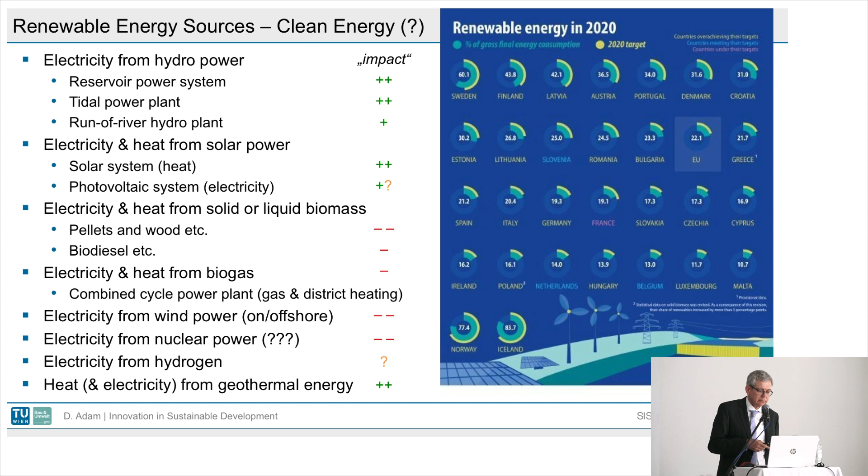And it is not time to talk about this in detail, but I would like to give you one example to compare energy systems with respect to the emissions of fuels for heating of buildings. And what I would like to say in the beginning, heating here is only on site. That means a central heating of the building, which is affected, and only the direct emissions are seen here. That means life cycle is excluded.

And now if you have a look at those energy systems which are mainly used in Central Europe: wooden pellets, heating oil, gas, electricity, air source heat pumps, geothermal heat pumps, and geothermal heat pumps run with photovoltaic electricity. We can clearly see both particulate matter, what we also call fine dust, and on the other hand, our carbon emissions.

That we see wooden pellets is disastrous. Heating oil is much better compared to that. Gas is better than heating oil, but not good enough. But the good news is that particulate matter is not contributing so much. And electricity very much depends on where it is produced. And there are two benchmarks.

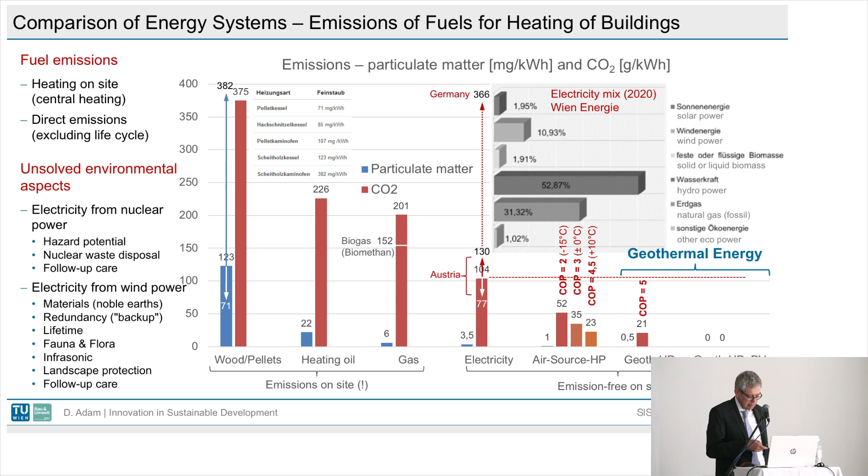Okay, coming to geothermal energy. In the beginning, I would like to show you a case history, which is my private one. This is my house, the house of my wife and myself, which was constructed in 1899 by one of the family members of my wife. At that time, the house was heated with coal and coke, and the heating demand was about 63 megawatt hours. In 1984, so 85 years later, my father-in-law refurbished the house and changed the heating system to a gas heating, but there was no thermal refurbishment of the house, so the heating demand remained the same.

And a couple of years ago, my wife and myself extended the house. Now the size is double what it was before. And what we did was a thermal refurbishment and insulation. We reduced the heating demand by a factor of 2, taking into account the square meters of the house. But in total, it remained the same, but it is double the size. And what we did, we changed it to a ground source system combined with a solar plant. That means on

the roof there are solar panels and a PV system, and in the ground 5 borehole heat exchangers, each with a length of almost 130 meters. And if you have a look now, what is needed from external energy is just the blue stains here. It's quite little. The rest is a gift of nature. And if you have a look at the numbers, we can see that only 15% of the heating demand has to be covered by external energy, by electricity, and 85% is given by nature.

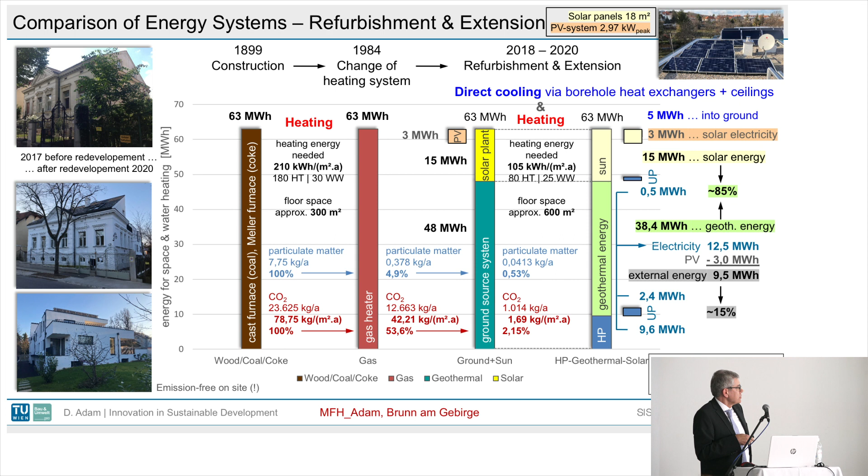Geothermal energy - this is one of the solutions I would like to talk about today. Geothermal energy is not new. If we look at our ancestors, they already benefited from the so-called thermodynamic inertia of the ground. They lived in caves - we have a lot of nice caves in Croatia. Here is a picture of adjacent Slovenia, Postojnska Jama.

What did the people do? They spent a lot of time in the caves, because in summer, when it was very hot outside, it was pleasantly cool inside, and in winter it was the other way around - pleasantly warm inside when it was very cold outside. This is due to the so-called thermodynamic inertia.

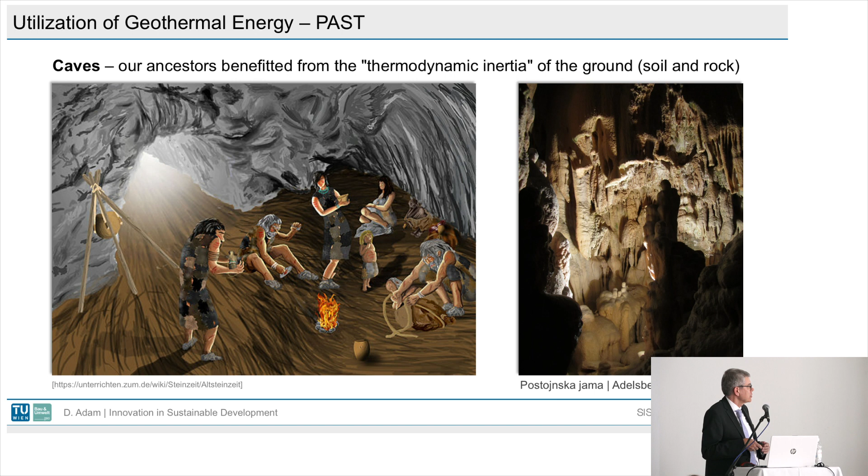And that is exactly what we use today when we utilize geothermal energy. What is necessary to utilize it? An invention that was already made in 1856, in experiments on the reproduction of heat bound in steam by water power for use in evaporating brine. What did this guy, Peter Ritter von Rittinger, want to say? Nothing else - he invented the heat pump.

With the heat pump we can increase the temperature, which is relatively low in the ground, on average between about 8 and 14 degrees, to temperatures needed for heating purposes - that means at least 25 to 35 degrees.

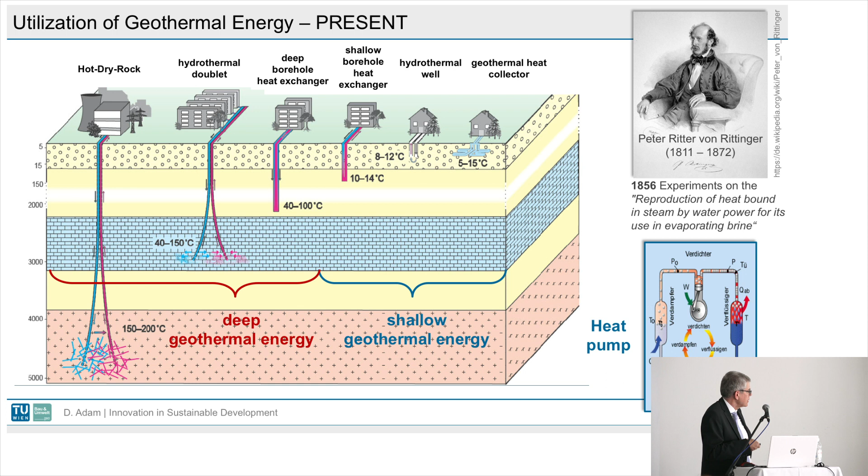We have different systems today: deep geothermal energy, which I will not talk about today, and shallow geothermal energy, which I will talk about today. In Austria there is a clear limit between deep and shallow, set at 300 meters, because different rights and laws apply. Up to 300 meters we have the water right, and beneath that we have the mining right. So this is shallow geothermal energy.

There is one more question: do we have enough geothermal energy? We did a study already 15 years ago in Austria. You can see our country with all the big cities - Vienna, Graz, Klagenfurt, Villach, Innsbruck, Salzburg, Linz, etc. What we can see here is that only in the centers are there some red spots.

That means there is no coverage of demand there, but we have to take into account that we investigated only up to depths of 100 meters, and we did not account for groundwater. So it's really just the earth we took into account, only up to a depth of about 100 meters. In the rest of the country you can see yellow and green spots, meaning there is a distinct surplus and even an excessive surplus.

In absolute numbers, talking not only for Austria but also for Croatia and all other Central European countries, we have a surplus of about 1,000 to 10,000 times more energy available than we need. So there is definitely enough geothermal energy for everyone.

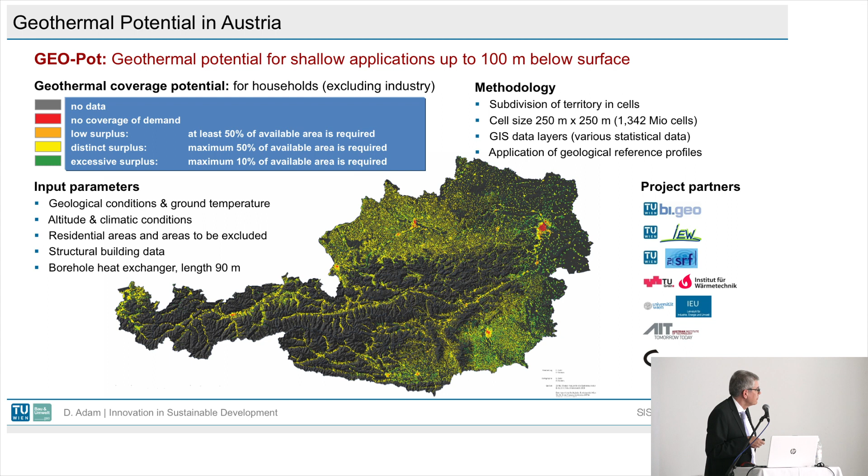So let's look at the system - how do such systems work? Geothermal energy is a sustainable, renewable primary energy source, and it is supplied for heating and cooling if we consider shallow systems. It mainly consists of two circuits: the primary circuit and the secondary circuit, with the heat pump in between.

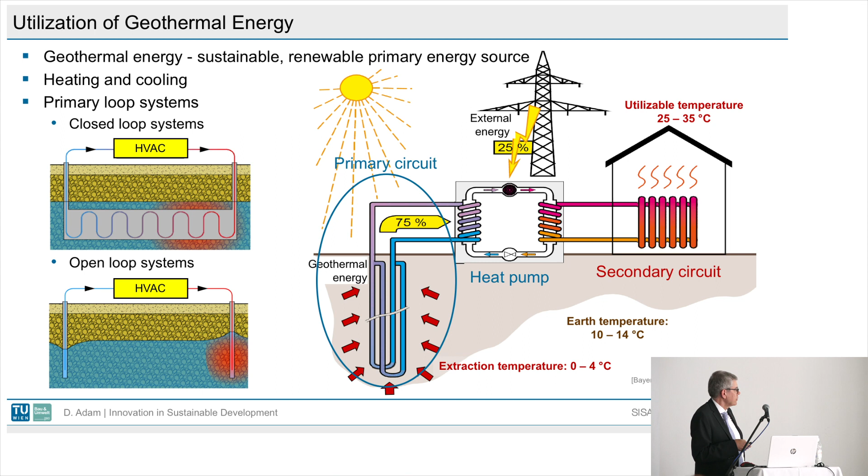And the primary circuit is made of a closed loop system or an open loop system. And from the geotechnical point of view, it is interesting to look at how we can extract the energy out of the ground. We have been working on that for almost 29 years now.

Closed systems: piles, geotechnical elements, bored piles or bored pile groups are earth-coupled structures, as well as driven piles and walls made of diaphragm walls, bored pile walls, mixed-in-place walls, sheet pile walls, slabs, floor slabs, tunnel elements, tunnel slabs, lining segments, and heat exchanger pipes incorporated in concrete structures. But there are more, for instance geotextiles in tunneling, or even anchors we developed, and others like sewers in big cities that transport a huge amount of heat which can be utilized.

For deep geothermal energy, borehole heat exchangers, the open systems are mainly wells, shaft wells, drilled wells, and horizontal filter wells. Energy can also be generated from open water, from rivers, lakes, ponds, etc. Others, with respect to deep geothermal energy, include the hot dry rock technology and the hydrothermal doublet. With these systems, electricity can also be generated.

If you look at a typical metro station constructed in recent years in Vienna, and which is also currently being constructed, we can see that energy piles can be applied, but also energy bored pile walls, diaphragm walls, energy tunnel slabs, energy floor slabs, and also energy geotextiles or lining elements can be used to generate the energy.

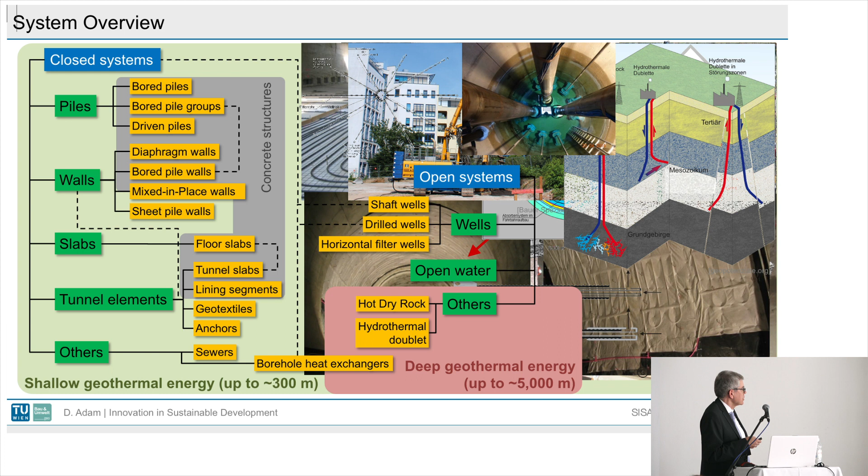So the positive thing is that we can use synergetic effects. All these elements need to be constructed anyway for structural and static reasons, and we can at the same time use these elements to generate energy out of the ground.

Sure, we need a place for the heat pump and the cooling machine, we need a place for all the pipelines, etc.

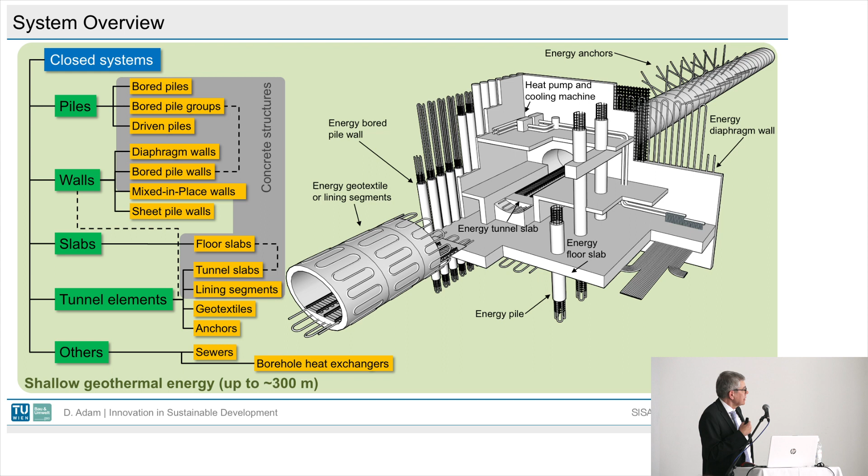Before we go a little bit more into detail, I would like to present the advantages when we look at the operation schemes.

The main application is heating with a heat pump, with high savings of primary energy. If you have a coefficient of performance of 4, that means the usable energy divided by the external energy, that is electricity, since both can be used. We have a coefficient of performance of 4 if, for instance, 25% of electricity is needed to run the system. Nowadays I would say we have COPs of about 5 and even more, meaning we need on average less than 20%.

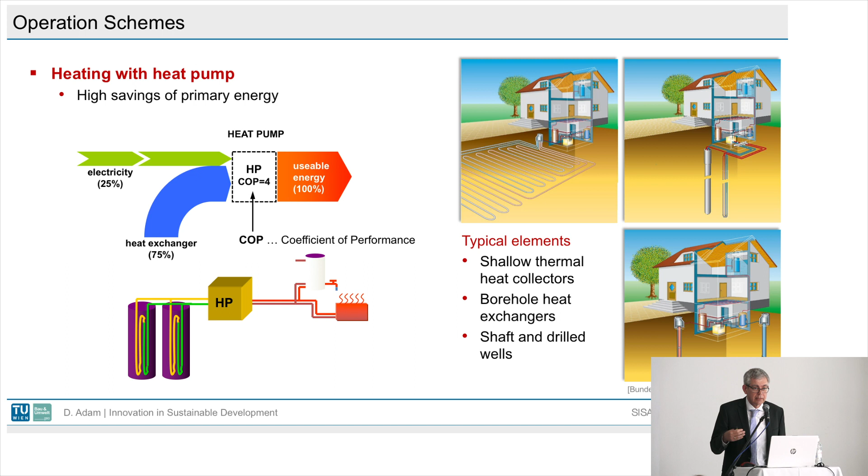Typical elements are shallow thermal heat collectors or borehole heat exchangers or shaft and drilled wells, with the disadvantage that they have to be constructed separately compared to what I presented on the slide before.

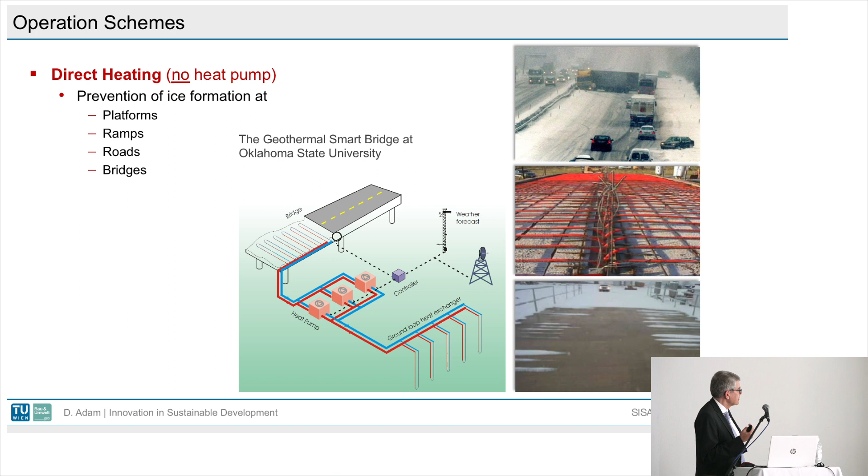Direct heating without a heat pump, for instance for prevention of ice formation at platforms, ramps, roads and bridges, can be done in some special cases. But more important is the cooling purpose, which is increasingly in demand. Cooling with a cooling machine is the reversal process of the heat pump.

Everyone has a fridge in their apartments, in their houses - this is exactly the same principle. But much more interesting is direct cooling when no cooling machine is needed, because there's no need for any air conditioning machines, and only the energy for circulation pumps is necessary.

From my point of view it is really impressive, and we've proven this in our house, where we have a so-called ceiling cooling system, that the removal of 50 kilowatts of waste heat can be done with just 1 kilowatt of pump power.

To give you the example of our house: every year we bring about 5,000 kilowatt hours back to the ground to regenerate it with our borehole heat exchangers. That means we just need 100 kilowatt hours, and 100 kilowatt hours costs about 40 euros. So the cooling of a house with 5 apartments just costs 40 euros. This is a big advantage and we should focus much more on that.

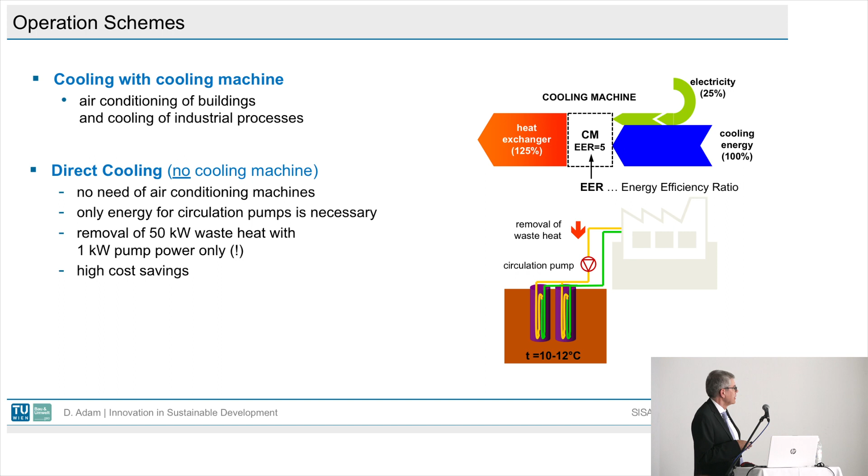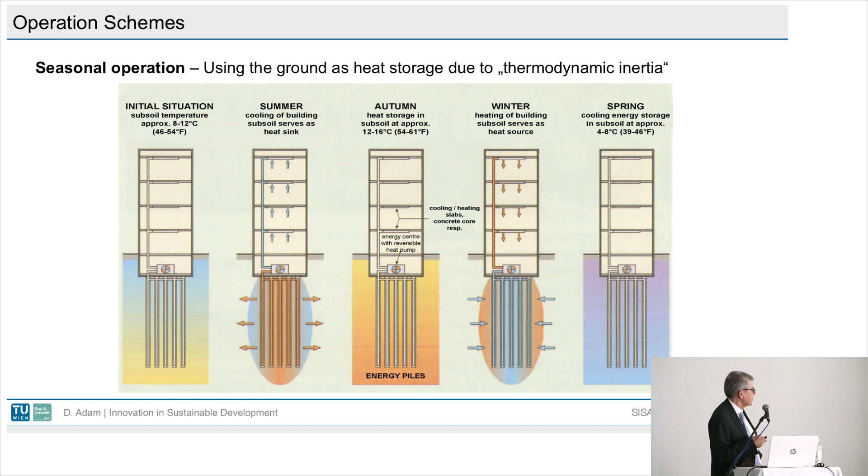With respect to sustainability, such plants should be operated seasonally. That means the ground is used as a heat storage due to the thermodynamic inertia I mentioned before, with respect to the caves of our ancestors - they did exactly the same. For example, in summer we start to cool the building, which means we heat up the ground.

In autumn we have a heated up ground, and this heat can be used in winter for heating the building, so we cool down the ground again. In spring we have a cooled down ground in order to start the reverse process, to cool the building and to heat up. If you're in balance, the ground is just a storage, nothing else. This is a big advantage.

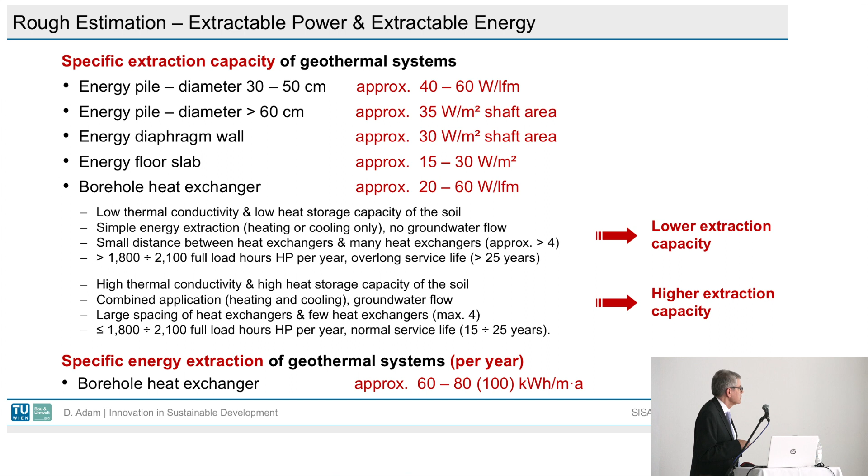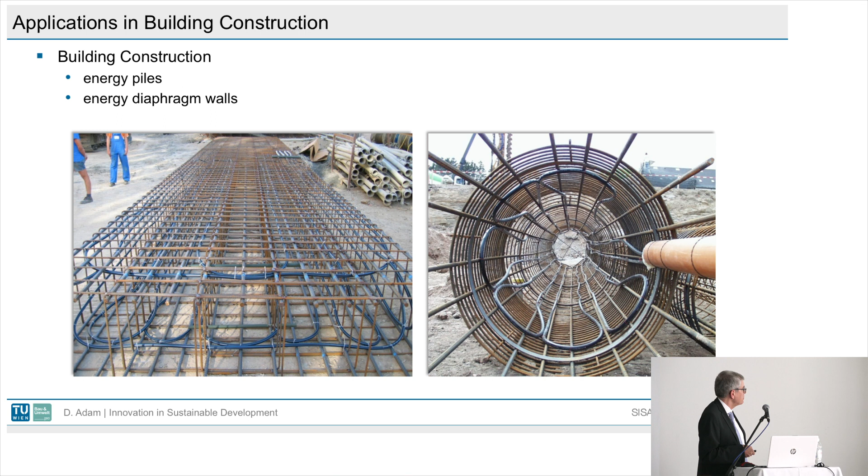Coming now to the heat exchangers in more detail, some applications in building construction and also in tunneling, what we did in the last about 29 years. Here we can see some typical energy piles and energy diaphragm walls. The absorber pipes, or heat exchanger pipes as they're also called, are mounted on the reinforcement cage.

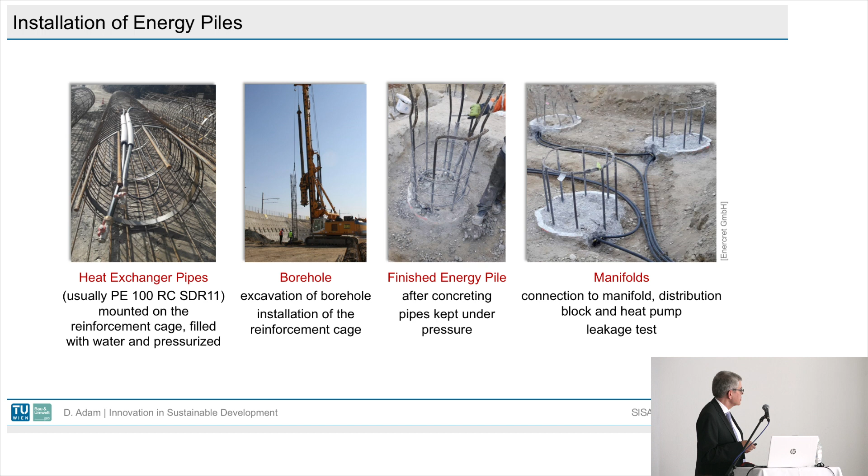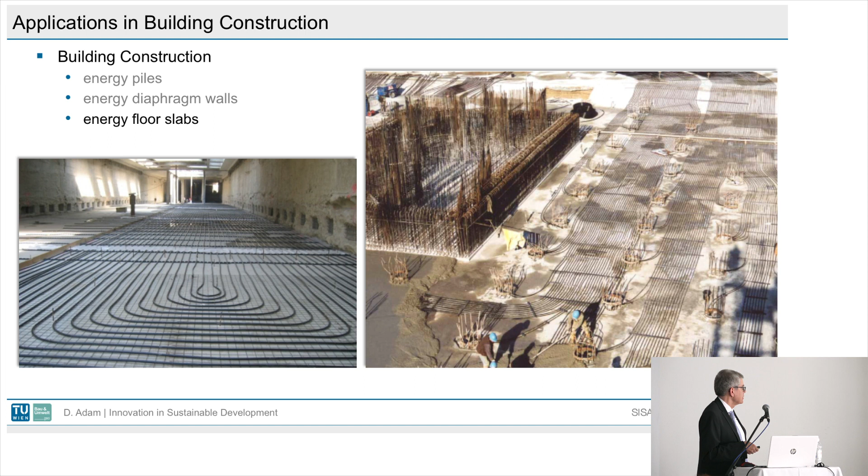Or the energy floor slabs, that means in the blinding layer all the heat exchanger pipes are installed, and they can be combined with energy piles, as shown here in the photo on the right-hand side.

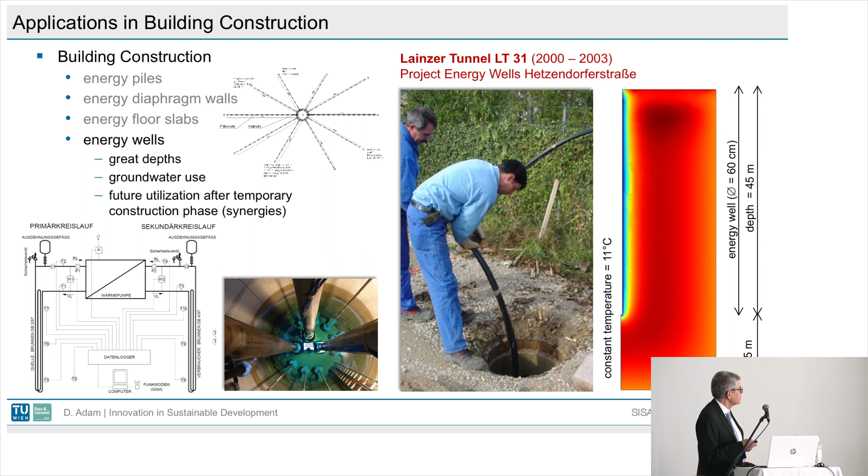Between 2000 and 2003 we developed the first so-called energy wells, closed loop systems, which are very close to the classic borehole heat exchangers. The big advantage of such wells is that we really have synergetic effects.

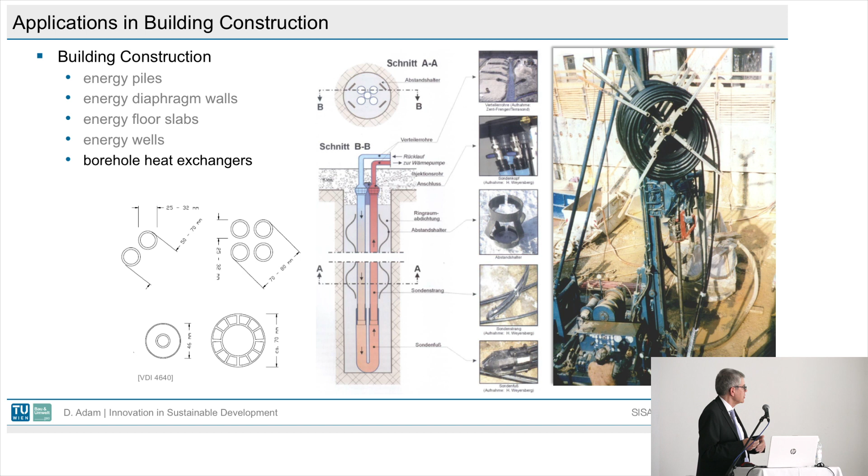In infrastructure buildings, wells are mostly needed to dewater the system for groundwater lowering, and at the same time these wells are not needed anymore after construction, but they can be used then as heat exchangers, very close to borehole heat exchangers.

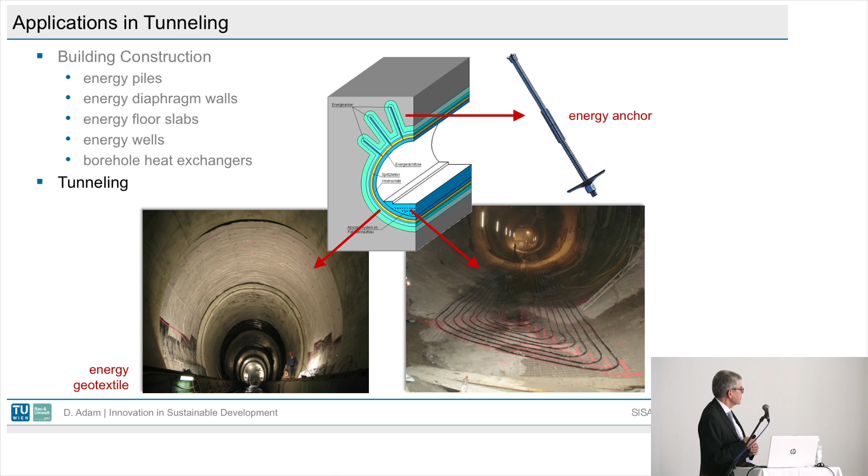In tunneling, we have developed 3 different systems: the energy tunnel slab, the energy geotextile, and the energy anchor. Already around 2000 we applied it to a tunnel, the 12-kilometer long Lainzer tunnel in Vienna, which connects the center of Vienna to the western outskirts.

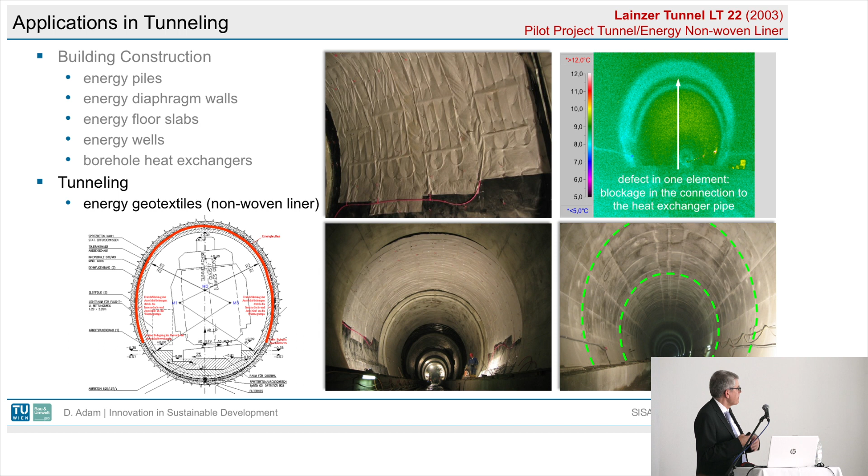We had 2 pilot projects there, and we applied the so-called non-woven geotextile as an energy geotextile. For the other way of tunneling, we can also use the energy lining segments. Here a prototype testing was done, and you can see a typical arrangement of the heat exchanger pipes.

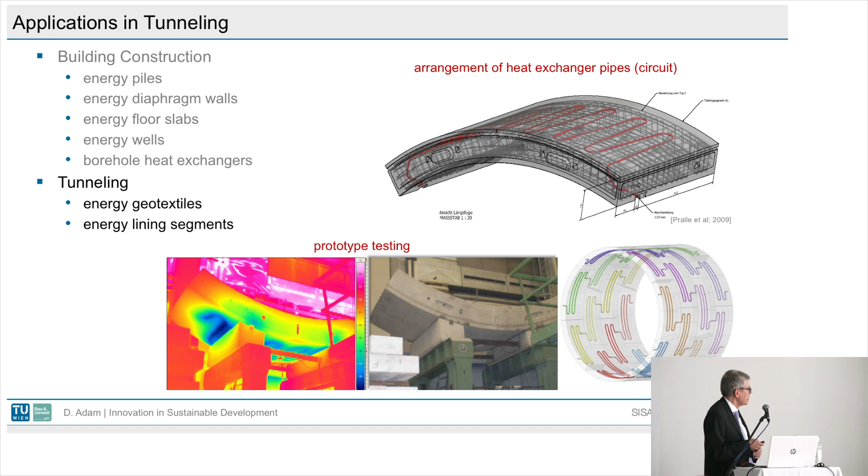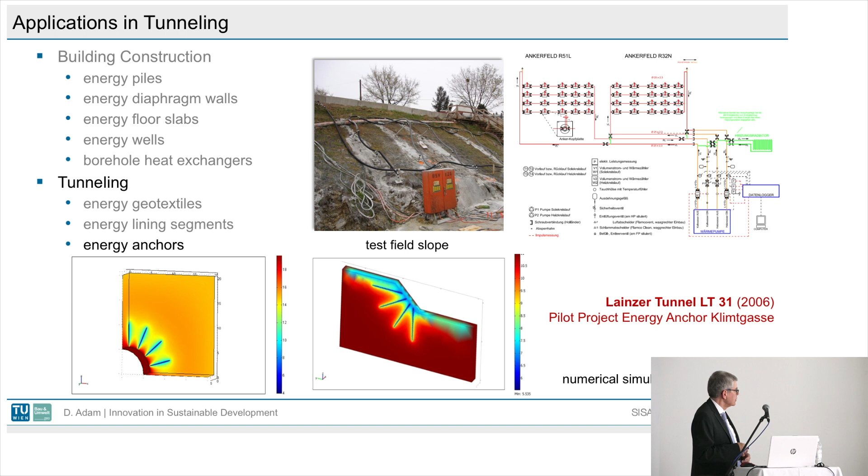We performed almost 20 years ago, 16 or 17 years ago, our first test fields, also within the project of the Lainzer tunnel in Vienna, and we saw that we can generate a lot of energy. Here the anchors were applied to a slope, and a huge amount of the ground can be utilized.

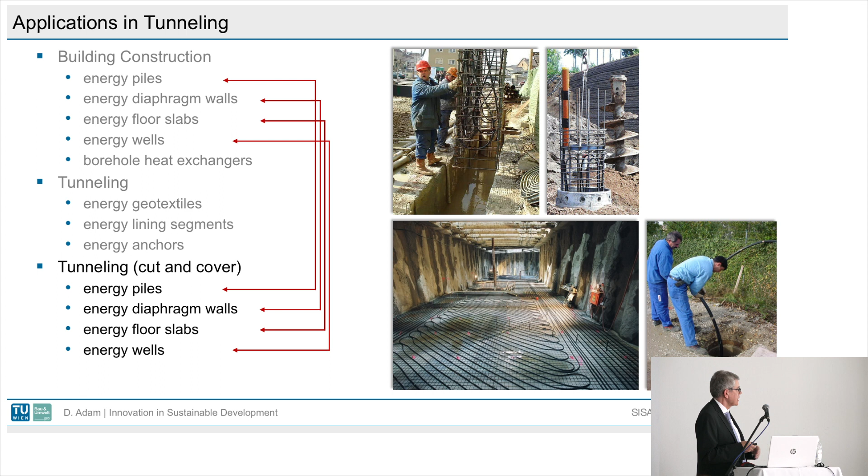If you have open tunneling, cut and cover tunneling, then we have exactly the same elements we use for building construction: energy piles, energy diaphragm walls, energy floor slabs, and energy wells. So exactly the same technology we have already seen.

Some special applications are of real interest, for instance energy sewers. As I already mentioned before, there is a huge amount of energy we litter every day, and we can utilize this energy within the house, the in-house solution, or what we did already 17 years ago, the first plant for the city of Vienna, where we applied a public sewer.

The very interesting finding was especially the extraction performance, because it's about 100 times higher compared to what we get out of the ground, about 100 times higher. And the explanation is quite simple.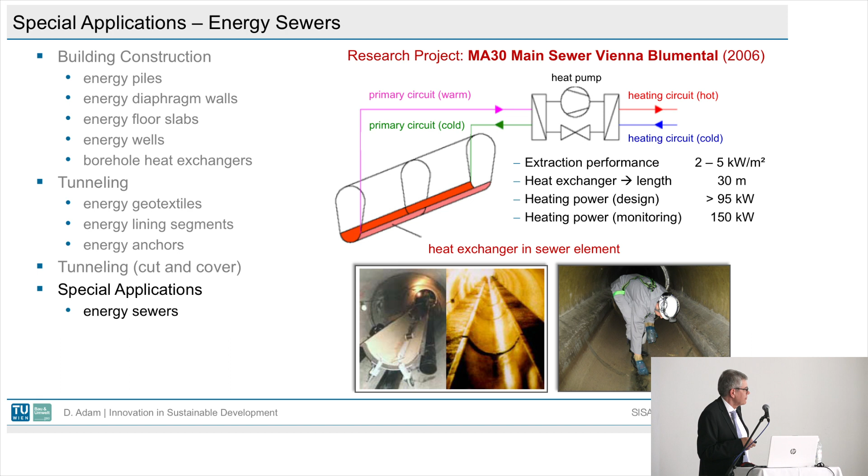If you look at the first project we realized in recent years, the annual average temperature is about 16 degrees or even higher, and every second new energy is transported, because everything in the channel is flowing. Where does this relatively high temperature come from? From the toilets - okay, this is not so high - but from the showers, the bathtubs, the sinks, dishwashers, etc. This is the reason why we have an average temperature all over the year of about 16 degrees, and this is on average 5 degrees higher compared to ground temperature.

This was realized now for the headquarters of Wien Kanal in Vienna. It's 2 new buildings with 8,000 square meters of space and 240 workplaces, with electric power consumption of about 102 kilowatts for heating and 98 kilowatts for cooling. So that's a lot, and just a length of only 185 meters of this sewer is sufficient to supply the whole building, both with heating and cooling energy.

So this is an interesting technology. The only question which arises is, whom does this energy belong to? We never had these discussions in Austria, but I know there are a lot of discussions in Germany, for instance.

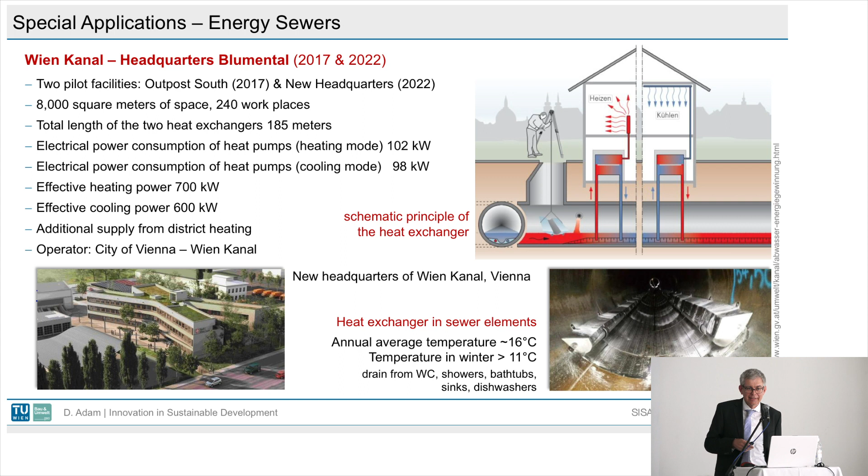But this will be a question also in the future. Okay, one example for open loop systems. Open loop systems are quite simple systems. I just need two wells for extraction, a source and a sink, and I take out the water.

As we can see in this simple example, if you have a pumping rate of 10 liters per second and a heating-cooling temperature difference of plus minus 4 degrees Celsius, we can achieve a thermal power of approximately 170 kilowatts. It's extremely efficient, and at the same time very cheap to produce such wells.

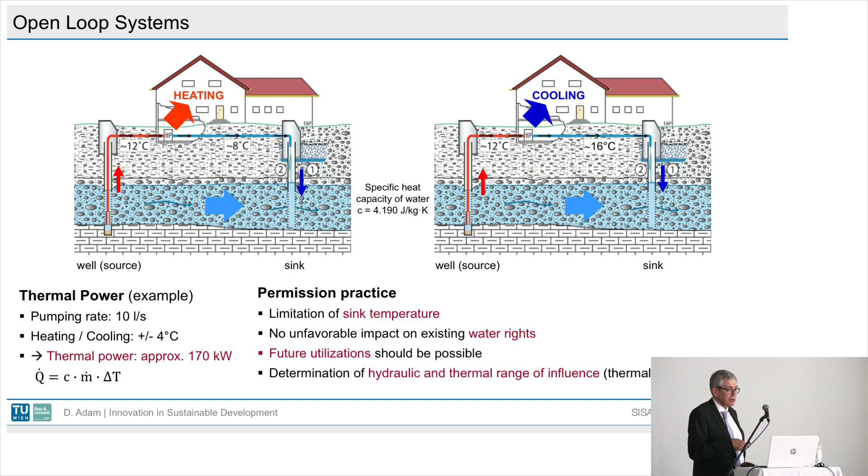Sure, the permission practice is a little different, especially the determination of the hydraulic and thermal range of influence has to be done, because the water rights are very strict in this respect, and that's okay. That's the reason why some complicated coupled thermohydraulic calculations have to be done. I won't go into detail on that, but it has to be done.

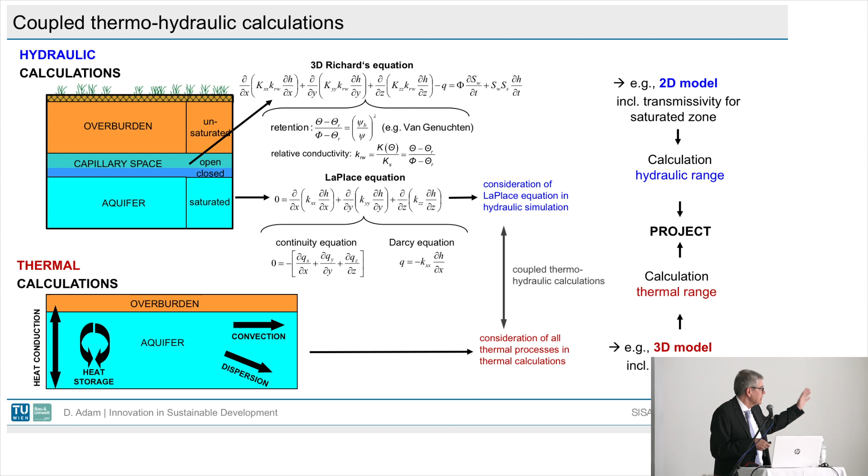Coming to the case history I wanted to introduce to you: the campus of the new University of Business and Economics in Vienna, which was constructed about 10 to 15 years ago. I remember well when the project manager came to me and said, we have committed to green building, but we have no idea what to do. You have open hands, you can do whatever you want.

So this was a nice situation, and we were thinking about what to do. Finally, the simplest and easiest solution was just to use the groundwater of the 2nd and 20th districts, which are the districts between the river Danube and the Danube Canal here. The thickness of the groundwater layer is only 4 to 7 meters.

But this is more than enough, because up to 150 liters per second are pumped out. This is a huge amount. And with this amount, the whole energy demand, both for heating and cooling, can be covered. Maybe you will ask, is it really possible to pump out 150 liters per second?

It's a huge amount. We had a lucky situation in that in the early 90s of the last century, the hydropower plant of Freudenau in Vienna was constructed, with the consequence that an embankment dam had to be constructed here. I was a very young engineer then, assistant to my predecessor, Professor Brandl. Otherwise, the whole 2nd and 20th districts would be underwater, would be flooded.

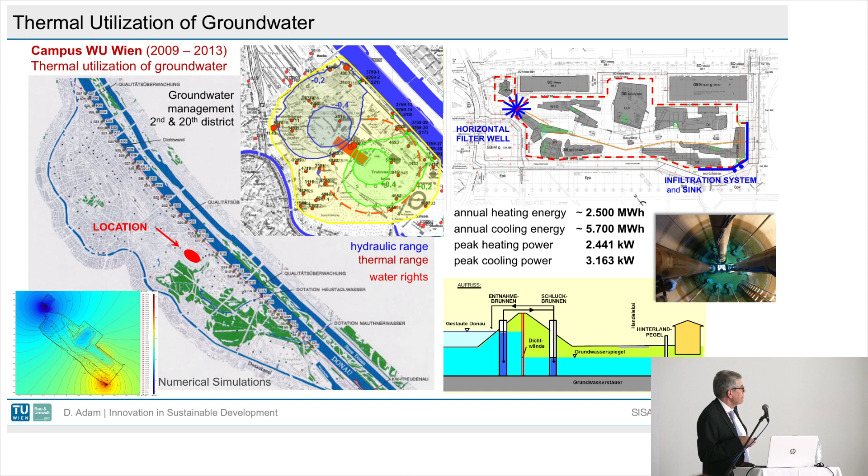Some applications and some details we have to think about, and some more projects I would like to present now in the last part of my presentation.

So not only the energy elements like energy piles have to be taken into account, but all the connection pipes that must be placed, the distribution blocks, the manifolds to the heat pump. The first project we were working on was in 1994.

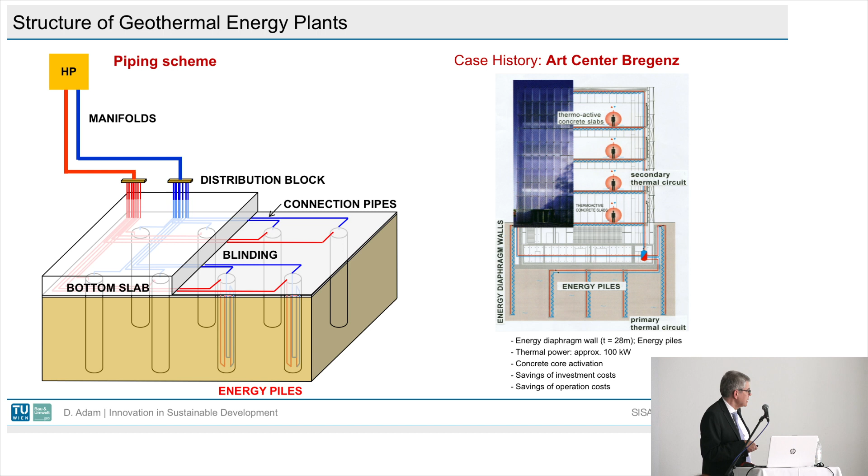It was the Arts House in Bregenz, in the most western part of our country. It was necessary to have a deep foundation consisting of both piles and diaphragm walls. The speciality of this project was that there was not a normal heating and cooling system.

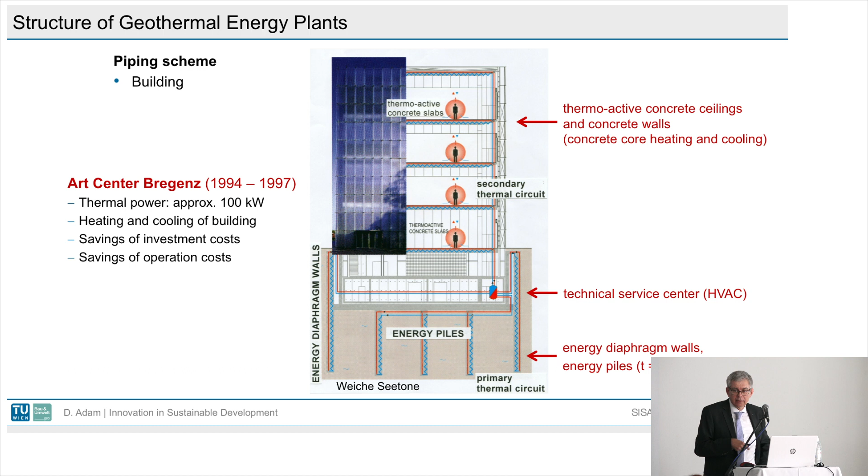It was the first project where the so-called thermoactive concrete ceilings and concrete walls were activated. That means the heating and cooling happens within the building, with all the walls and ceilings equipped.

Another case history, this was my personal study. It was the first project in Europe, and moreover I would say worldwide, where a retaining structure for slope stabilization was used. This is a rehabilitation center in Upper Austria.

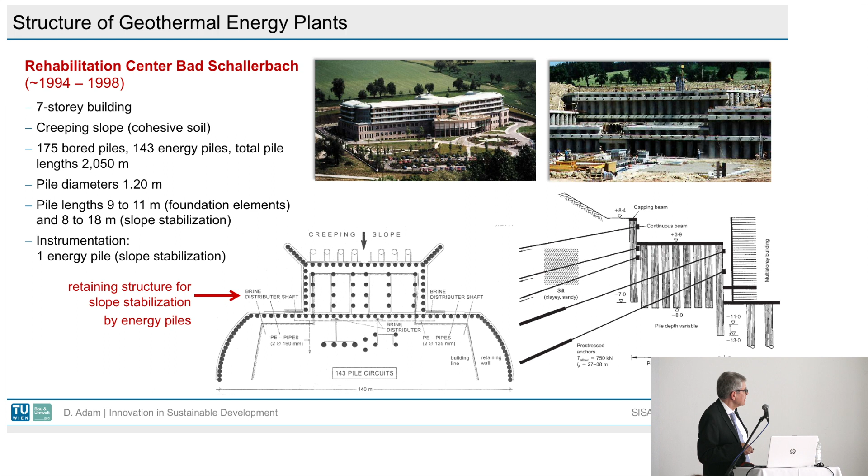Nowadays the whole building is heated and cooled with energy piles which were necessary for the retaining structure. I remember well when my predecessor, Professor Brandl, was asked to work on this project, but in geotechnical terms.

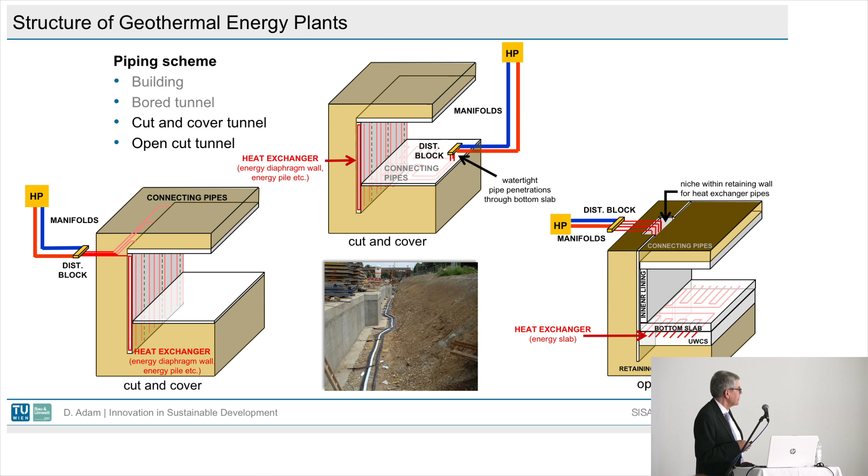And then the idea came up to use all these piles as energy piles. He asked me, it's up to you now, this is your job, think about it if it is possible or not. And it is still working today.

One question which came up in the last decades is the load displacement behavior of energy piles, because we have a thermal loading on that. These discussions we had with a lot of colleagues, especially within Europe but also abroad, motivated us to perform some energy pile tests with respect to the axial pile load investigations.

And we equipped two piles, one in quaternary gravel, the other one in Miocene sediments. And we did some calculations, some numerical simulations before, as we always do.

And then we equipped these two energy piles with a lot of monitoring systems like sister bars for axial strain measurements, chain extensometers for axial displacement measurements, strain gauges for radial strain measurements, temperature gauges over the pile for temperature measurements, both within and around the test piles, and also in the surrounding elements.

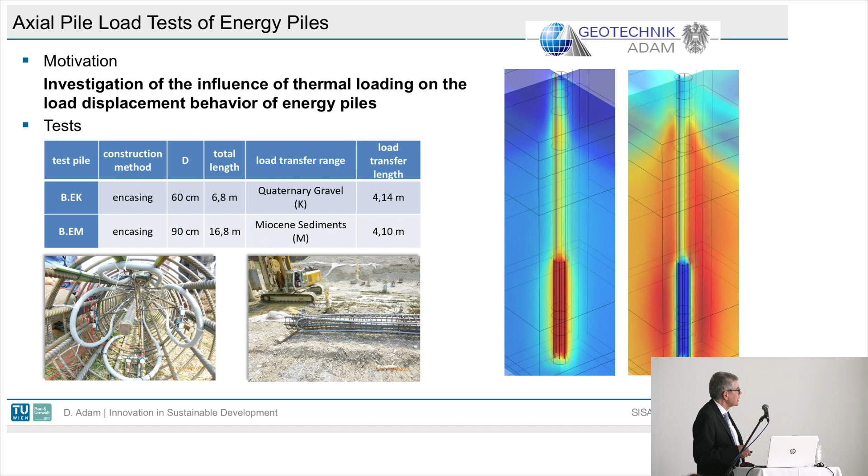And what is always very important is that we have a so-called dead load as loading, because we have to measure our displacement of the pile, and it does only work if you have a dead load.

Just to give you some exemplary results, we have here two phases, a loading of 600 and 800 kilonewton, a heating phase and a cooling phase. And here is the temperature development, both for heating and for cooling, not going into detail of that.

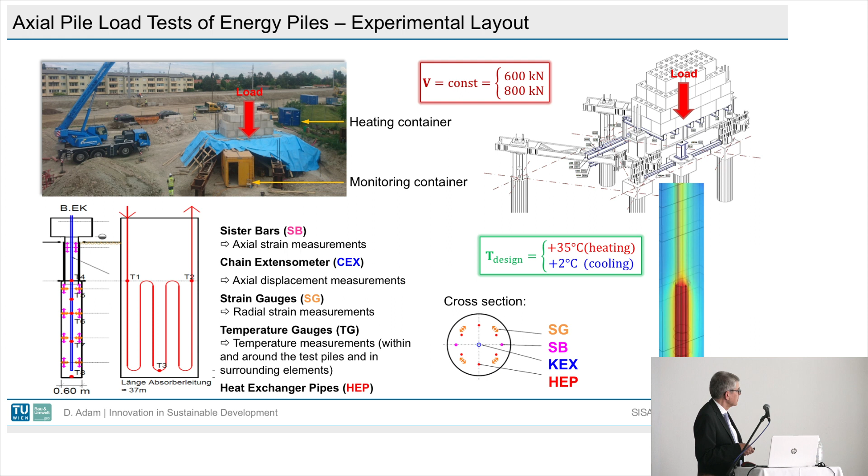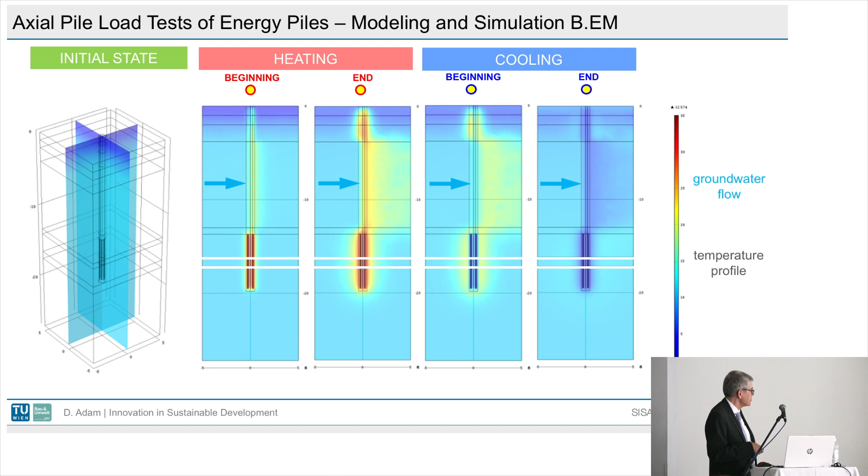But the interesting thing is there are some deformations, and they are not so little. So we have a heave and we have settlements just due to the thermal loading, and it is about plus minus 3 millimeters. We have the same also measured with the longitudinal strain gauges.

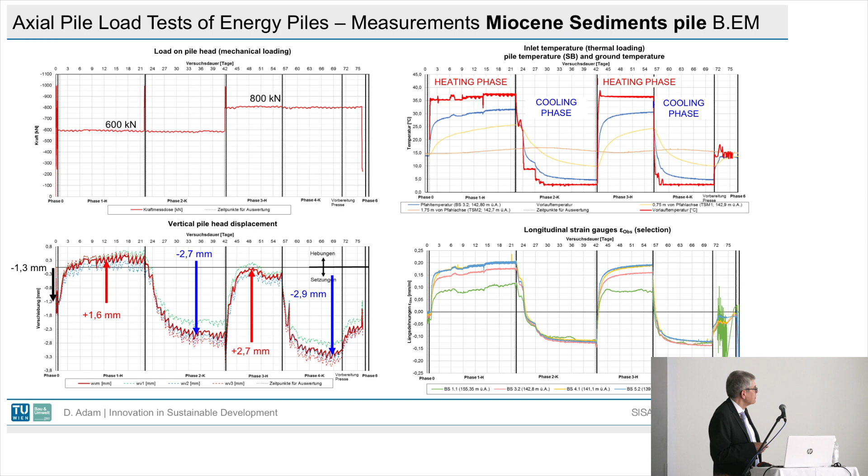But what does it mean now for the load displacement behavior of such an energy pile? We compared these energy piles with normal piles, which were constructed very similarly. And what we could see is that the energy pile is at the upper limit in the quaternary gravels, and it is much better in the soft soil ground conditions.

And what is the explanation of that? There is not a deterioration. It becomes better because we have a kind of thermal pre-stressing of the piles, which improves the performance of such a pile with respect to the axial pile loading.

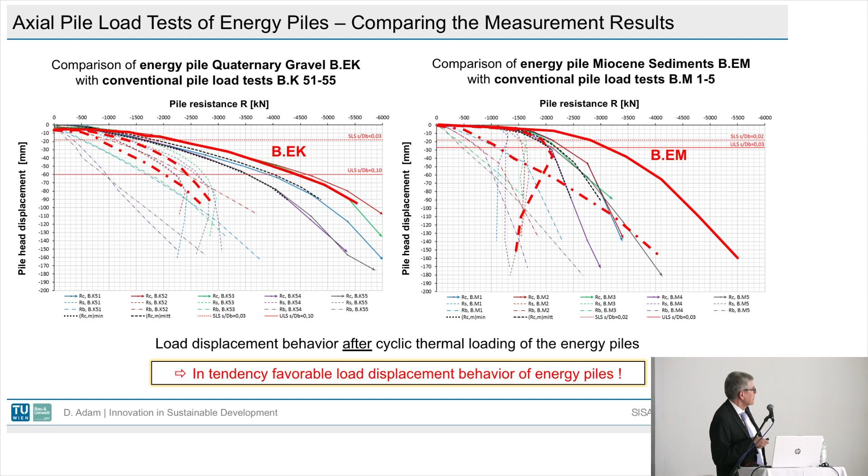Coming now to the last part of my presentation, very briefly. As already mentioned, we started about 28, 29 years ago to do research in this field. And it was about 23, 24 years ago that we started with the two pilot projects I already mentioned in my presentation.

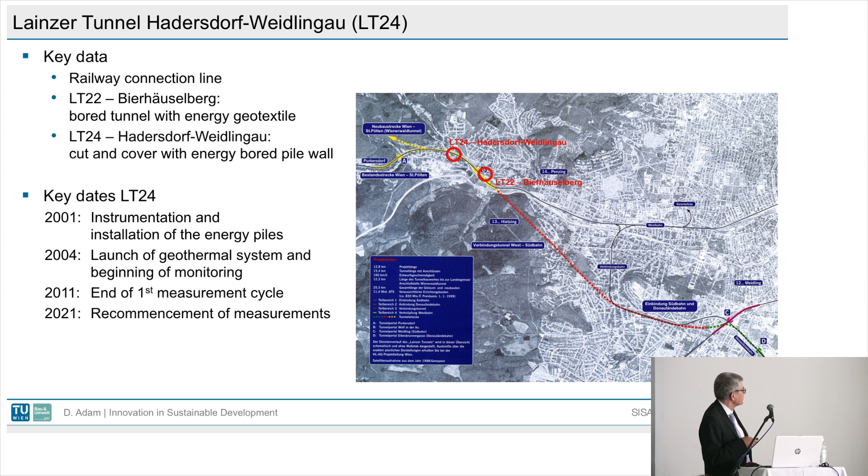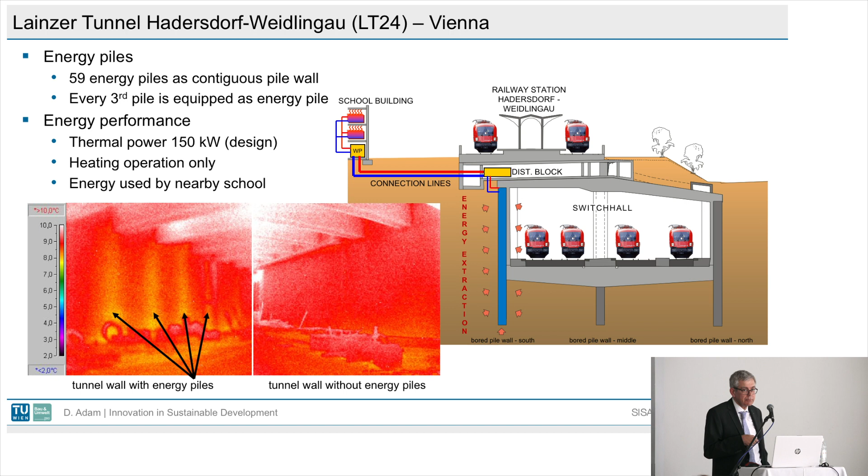One is the so-called section Hadersdorf-Weidlingau, where we have an open cut. On one side of the wall, 59 energy piles were equipped with this technology, meaning every third pile was equipped as an energy pile. The energy performance was about 150 kilowatt, and this energy was used up until last year for heating a school.

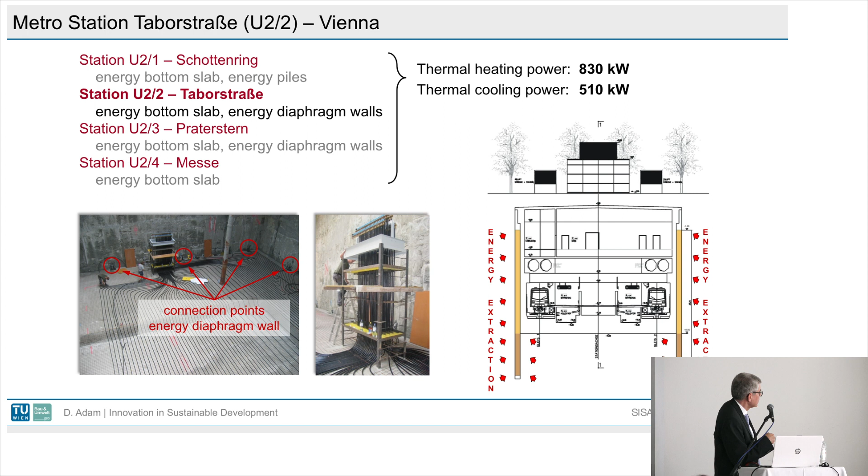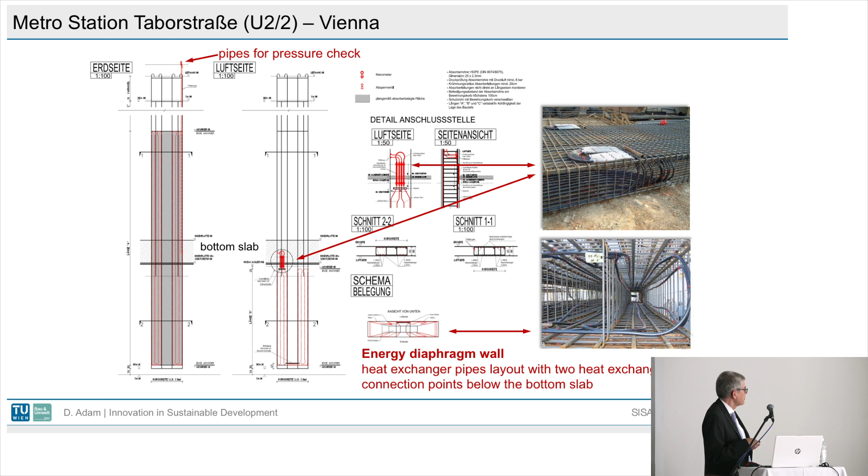I do not go into detail of this project, but a little bit more on this project, which was about the same time when, due to the very positive results of our first pilot projects, the Vienna city decided to equip 4 metro stations with this technology, as we have seen in the schedule already in the beginning. So we did a feasibility study, instrumented and installed the energy diaphragm walls in this case, and also the energy bottom plate. In 2008 we started with the monitoring, and we are doing the monitoring still now.

And we did not only instrument the whole system, but we also had to solve a lot of different details, like the connection points of the energy diaphragm wall, where to place them. For instance, you can see here the heat exchanger pipes layout with 2 heat exchanger circuits. The connection points were below the bottom slab.

Why was this necessary? Because we have a water pressure of about 25 to 30 meters. That means we needed a water pipe penetration through the bottom slab, which was a challenge, but finally it worked, and we could also solve these problems. So it was the details which are challenging, not the idea behind. The idea behind is quite simple.

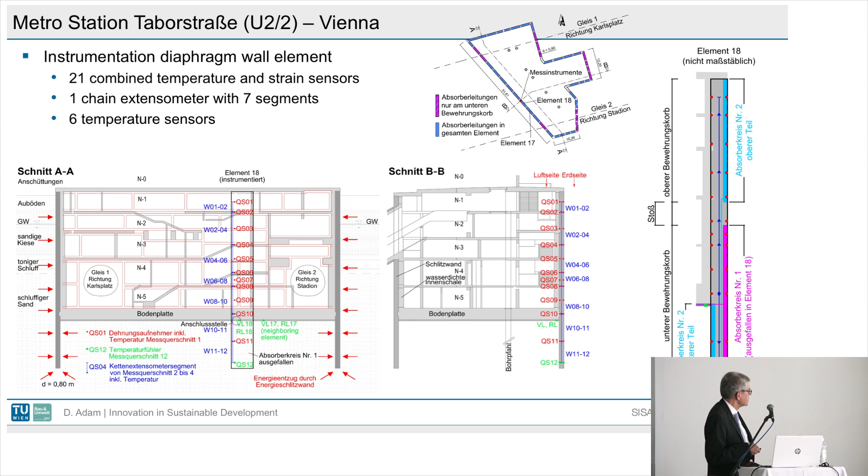And what we did, we instrumented the diaphragm wall element, as we can see here, with combined temperature and strain sensors, with a chain extensometer with 7 segments and some temperature sensors outside. And just to give you a few results about what we measured in the last more than 14 years.

So the first result: the temperatures in the diaphragm wall are above 0 degrees, and it is necessary that there is no freezing. The temperature curve is almost independent despite continuous operating time of more than 14 years. That means the system is definitely sustainable.

And the temperature trend above the slab is almost independent of thermal operation, meaning the temperature mainly follows the outside ambient temperature. The temperature difference between inlet and outlet in this case is less than 1 degree, meaning we still have large thermal energy reserves.

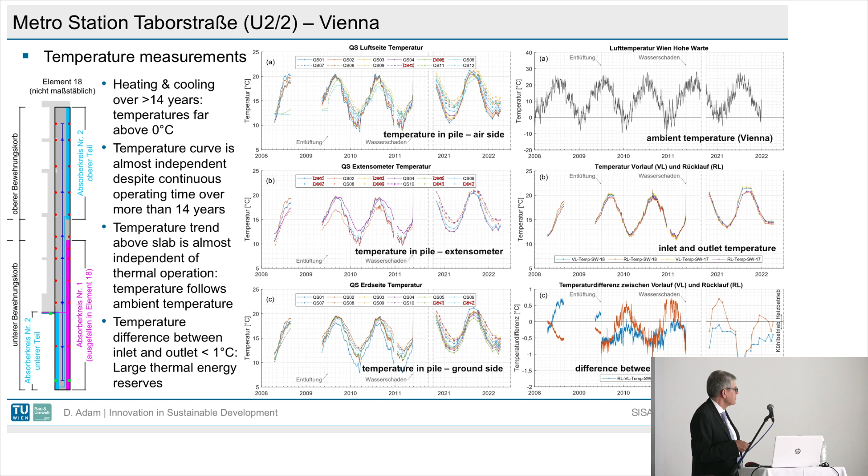With respect to the strain measurements, just to give you one result: the strains, about 0.17 millimeters per meter, are very, very small, much smaller than what is caused by structural reasons. That means, in this respect too, the system works.

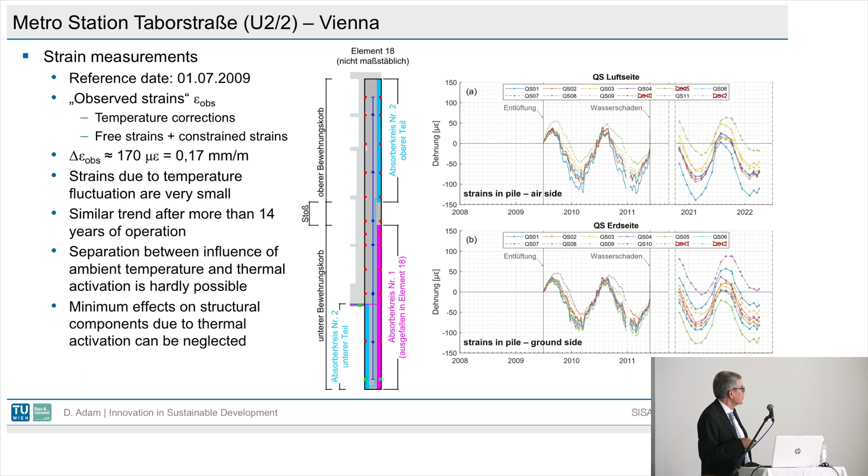So coming to my conclusion: we have applied this technology for infrastructure buildings for far more than 25 years, and these geothermal systems have been proven for decades now. Numerous systems allowed application in a wide range of boundary conditions and construction methods. The most important message is there is no case of damage known up to now. We have instrumented some hundreds of kilometers of these elements, and it perfectly works.

So what we are doing now is generating long-term measurement data, as I've briefly presented, to verify the analytical and numerical models. We're developing further to optimize the system for future projects, doing thermomechanical modeling of energy piles. This is a following project of our Excel pilot test projects, and we are currently developing planning tools for the holistic design of geothermal plants, which does not exist until now.

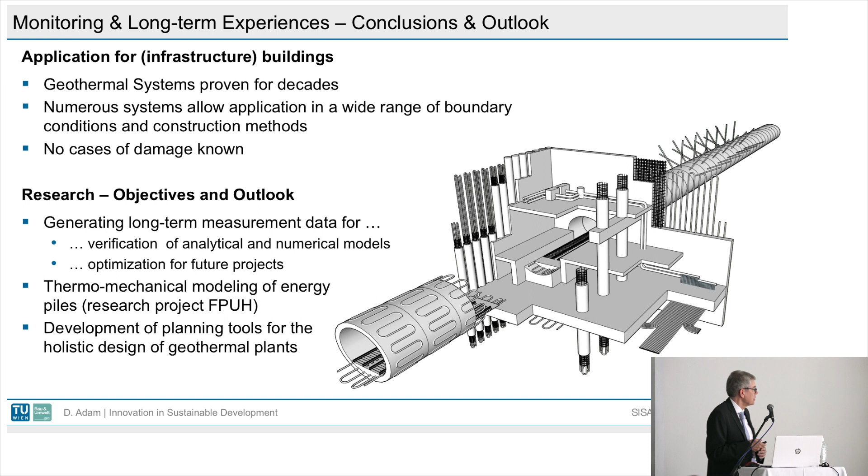And not to show off, but already in 2008 we won the highest award for engineering work in Austria, the State Award for Transportation, in the scope of sustainable infrastructure for the 21st century.

And as you can imagine, since the war in Ukraine began, every day the phone rings, every day I get email, because now people have realized this could be a part of the solution.

And when I mentioned in the title of my presentation that we have an energy crisis, from my point of view, it is not true. We do not have an energy crisis. We do not have an energy supply crisis.

So did you have any problem with the supply in the last year? Not really—not in Austria, not in Croatia, not in the US, not in Lebanon, or wherever. We didn't have it. And we didn't have a crisis with respect to the energy infrastructure.

Sure, it can be improved. We just have a situation of uncertainty among people, which is made by media, maybe by politicians too, I'm not sure about this, and this finally made the prices so high. This is now in the focus of interest, to apply these technologies which are already available nowadays.

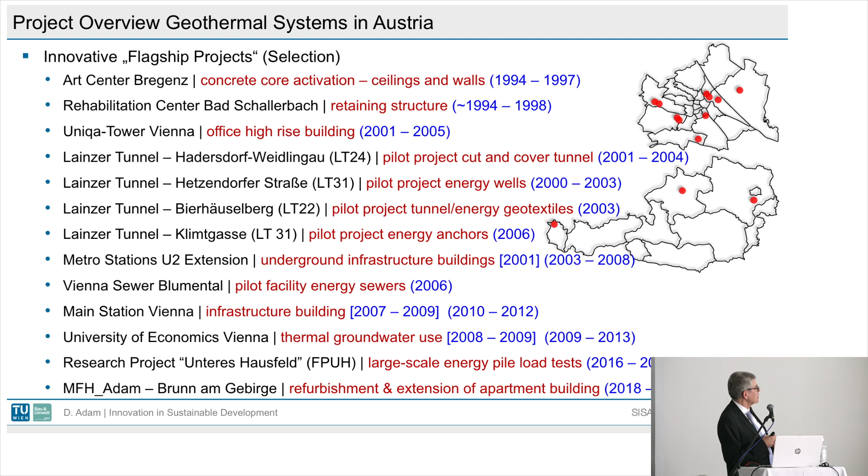And coming back to what I mentioned at the beginning of my presentation, the United Nations Sustainable Development Goals, the common vision—I've rearranged these 17 goals through the 5 Ps: people, the provision of material needs, prosperity, planetary integrity, and political institutions, peace, and partnership.

And where can we as geotechnical engineers contribute? In every row. At the universities, in the high schools, we can provide good education. Provision of material needs—clean water, that's what I've talked about today—affordable and clean energy, and also the reduction of energy need we can achieve. As I've presented before, only 15% of the energy which we need comes from external sources.

The rest is a gift of nature. We have to take that into account. And with respect to planetary integrity, we have climate action, which is important, and prosperity—sure, we have industry, we have innovation, we have infrastructure.

And I remember well, and some of you also attended this conference in 2017—it was the 19th International Conference on Soil Mechanics and Geotechnical Engineering in Seoul, Korea. Janko and Milorad and many of you attended this conference. And Ban Ki-moon gave the opening speech, and he said: I strongly believe that geotechnical engineering is the key to solving natural and man-made disasters derived from conflicts between man and nature. This is a very, very important saying, and it should motivate us.

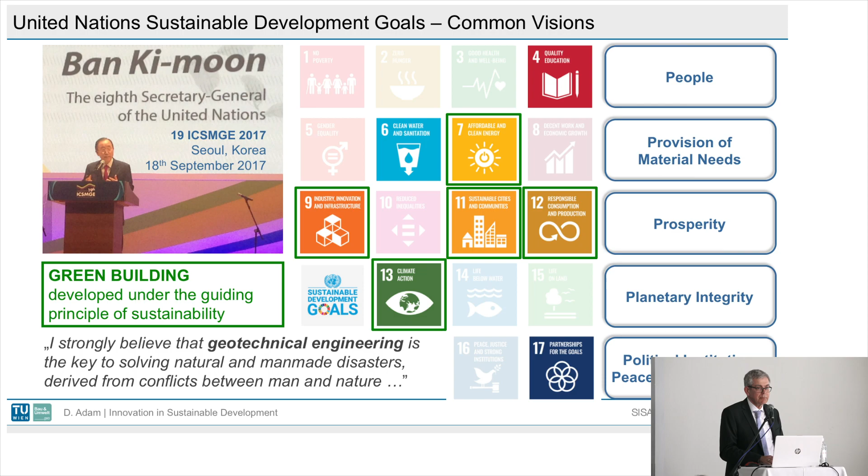To be more self-confident that we, as geotechnical engineers, can really contribute to making a better world with respect to green building, always developed under the guiding principle of sustainability. That's it, thank you very much for your attention.